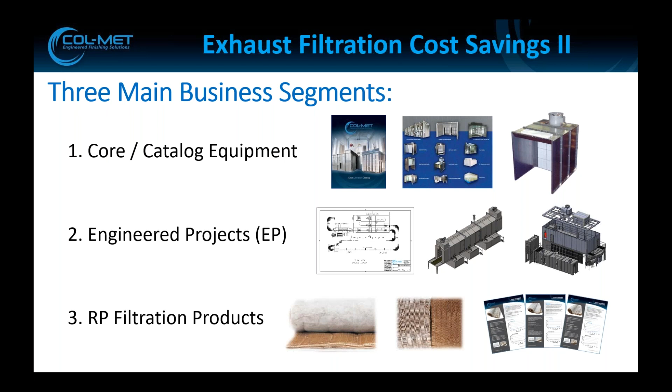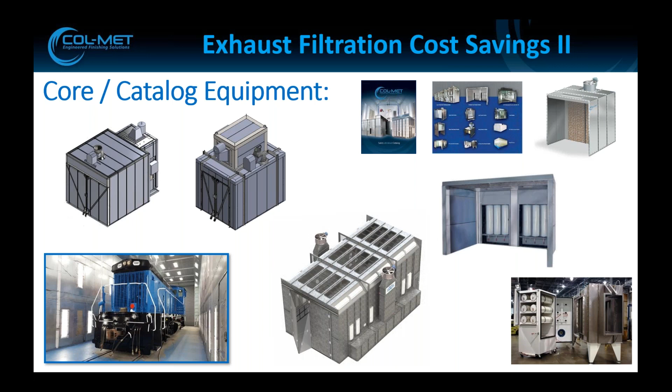To give you some examples, the core and catalog equipment, as I mentioned, is more of a standard type of booth. That can be a small booth up to a large booth like a locomotive, but the booth geometry is fairly simple, the airflow is fairly simple. For us as a spray booth manufacturer, it's very run-of-the-mill type equipment, even batch ovens of certain sizes and pass-through powder applications.

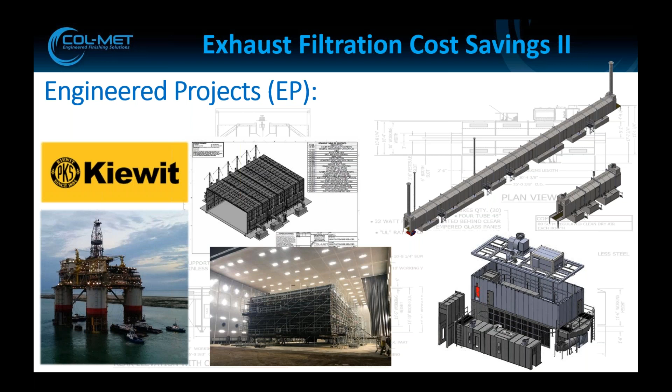But once we move out of that norm, we move into our engineered projects, which handle a lot more design, a little more engineering up front. The example on your screen is a very large booth for offshore oil rigs, about 265 feet wide, close to 200 deep, and about 65 feet tall. That particular booth blasts, paints, and is humidity controlled, so obviously there's a lot going on with that type of equipment. That falls into our engineered projects group.

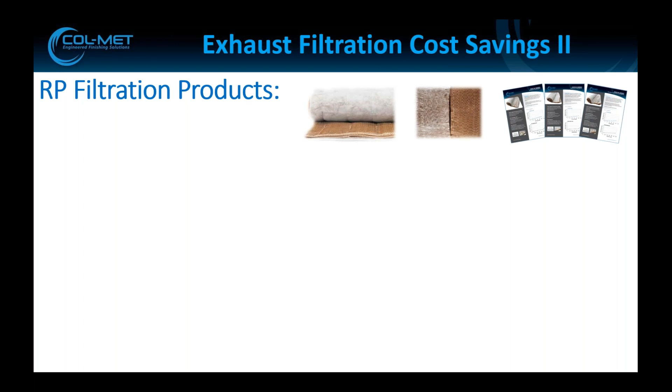Really where we want to focus is on our RP filtration products for this presentation. To give you a timeline, in 2017 Col-Met acquired Research Products. A lot of people ask, Trey, what does RP stand for? And that's just Research Products. We kept the RP initials in the name just to keep some brand recognition.

Research Products was the first manufacturer of a slit and expanded paper filter, and has been doing it well over 50 years, so there's a lot of brand recognition out there. We kept that and took over that part of their business in 2017. In 2018, we integrated that into our facility and brought all the manufacturing into our Rockwall, Texas plant. That was our main focus for those years.

Last year and this year, our main focus is growth. We brought on some filter specialists, created some new products and new programs. One of the new programs we're excited about is our 5-year warranty program. If you buy a Col-Met spray booth that qualifies, for pretty much a liquid spray where it's not a powder spray where we're utilizing the paint arrestor, then we send out the W series filtration with it.

Because we're so confident in that filtration, and we're the manufacturer of it so we know the quality and what's happening, we offer a 5-year warranty on our spray booths. That includes the booth and the air makeup units, anything associated with that piece of equipment purchased from Col-Met. That's a really cool program, especially if you're tied into the sheet metal or booth side of our company as well. That helps move things through.

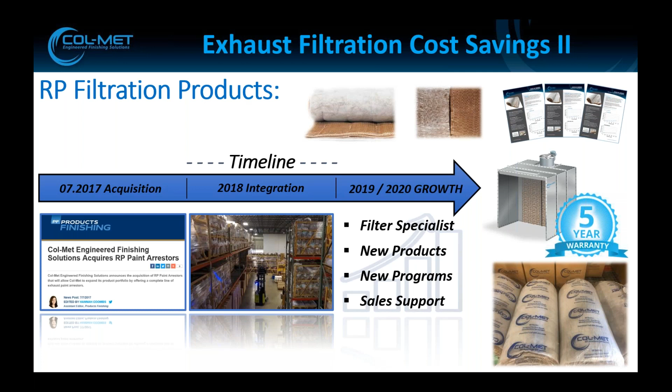To move through to the overview of our presentation today, this is a continuation of a webinar we did previously on exhaust filtration cost savings. What we concentrated on in that presentation was showing you the advantages of going from a pad filter, which is a 20 by 20 or 20 by 25 cut filter, to a blanket type media and utilizing the filter lock.

So I'll recap a little bit of that for this presentation, but mostly we're going to focus on a manometer. And oddly enough, you say, well, I don't understand how that can save me money. Well, from an end user perspective, a correctly set up manometer could possibly extend the life of their filtration.

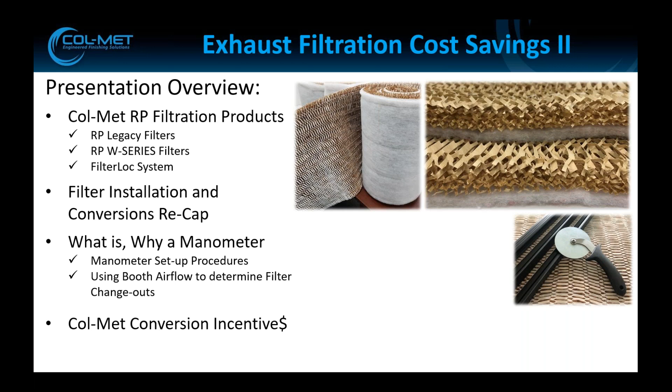So thanks for bearing with me through that introductory part. The RP filtration, in case you're not familiar, is a slit and expanded paper. The way that it's engineered really sets it up well to depth load, compared to like a polyester, which does a lot of the catching on the front of the polyester surface.

When you're talking about particulates and particulate sizes, there's larger and there's smaller. Well, those larger ones get caught on the front layer, and they face load that type of material - polyester, fiberglass, things like that. They want to face load. They don't necessarily load from the back to the front, or the finer materials out to the larger density opening. So our filter is designed to function that way because of the paper layering and the slit sizes.

We do use a polyester backing on some of our models, and our legacy series, if we're looking to bring our efficiency up for those smaller particulates I was talking about. And they're available in pads, blankets, and bags. So there's several models to these.

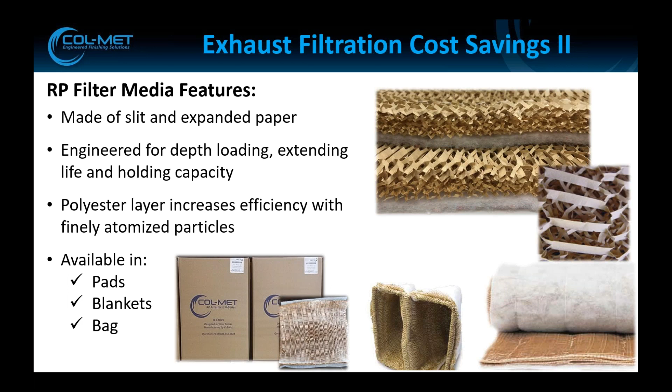I bring this slide up every time because I've had people say, well, we tried paper filters and they didn't work, and I don't want to talk about them anymore. But to be honest with you guys, before Col-Met acquired RP Products in 2017, I had the same opinion. I thought there was one paper filter. I didn't know there was different layerings and different paper weights and different orientations and slit sizes and things like that when it comes to the slit expanded paper.

So I bring this slide up to show you that we have a lot of standard families or models of filters, and each one performs differently with a different type of coating. So more than likely we have a filter that will work for your application.

Now, I'm not going to sit here and say that our filter works for 100% of applications. To be honest with you, if any filter company makes that claim, then they're kind of stretching the truth a little bit. Now, will it work? Sure, it will. Is it the most optimal to use in that situation? Probably not. So we have different models so that we can help that optimization to get where we need to be and achieve what we need to achieve. So I bring that up for that.

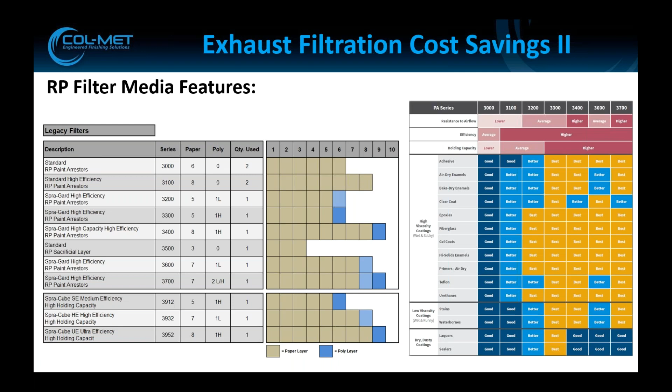Our newest filter that I talked about with our 5-year warranty is what we call our W series. And in essence, it's almost exactly the same as what we've been manufacturing before, but we did change up the paper layering. We did change up the face sheet of this filter and put a white face sheet on it. It doesn't change the performance of it any, but it does sort of brighten the booth up. It does change the look of the filter, and it gives the ability for this filter to be identified in the field as what it is, and to separate us from maybe our own filter as well as our competitors.

So the biggest difference here is our polyester that we use with these filters - it's a virgin polyester, whereas on our legacy line, we use a recycled polyester. So that is one of the biggest things. That's why we feel so confident about this filter, to be able to offer a 5-year warranty as long as these filters are being used. And we don't take away a warranty, we just extend it for 4 additional years, pretty much what we're doing.

So these come in pads and blankets as well. Right now, I don't have a standard that's made as a bag or a cube, but it can be done if we needed to. So just keep that in mind.

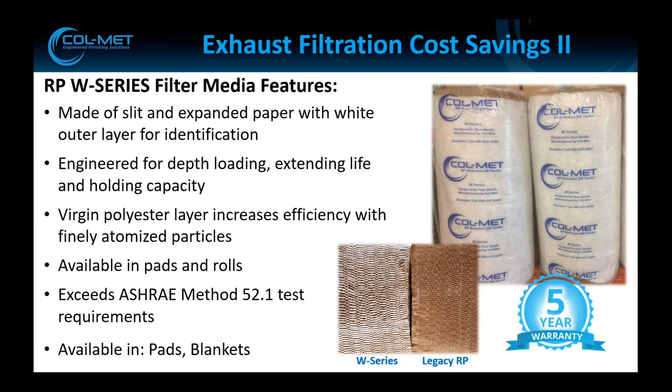Now, when we talk about the models of this filter, we've sort of brought the models down into a little more manageable type - a little more of what we see as the higher usage type filters from our history with making filters, since the 50s. We've settled into 3.

That just helps our distributors and end users better select a filter without having to go through so much gyration in models. But like I say, they're all designed to work a little differently with different types of applications and coatings, so just keep that in mind.

If you did buy a Col-Met spray booth within the last year, it would have shipped out with what we call our W5100 series, just as a standard, unless we were told differently. So that's sort of the middle of the run of the W series.

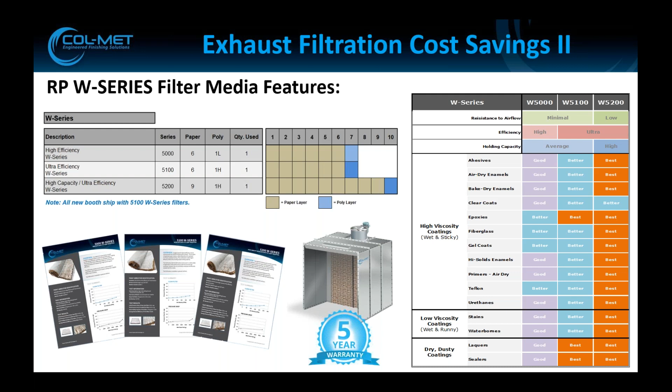I wanted to touch base again on our last presentation with the cost savings and the installation and the conversion. So there's a lot happening on this slide. I know I just took a slide from that presentation.

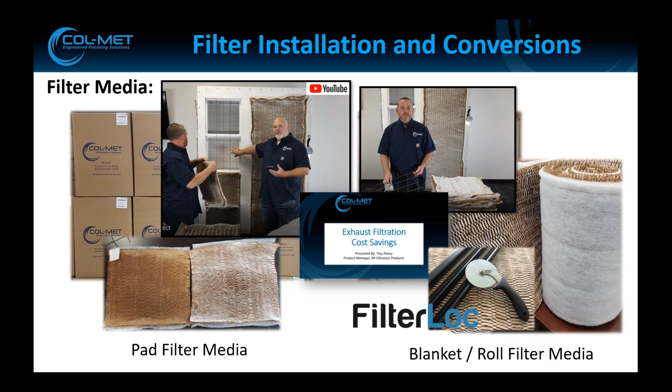So let's talk about some new information. And why did I say, hey, let's talk about a manometer when we're talking about filters? So a visual gauge is required by OSHA.

Now, it can be a manometer, which I'll show you right now. This is a gauge, a device that's sent out with all of the Col-Met spray booths. If it has an exhaust chamber, and it's for liquid painting, it has one of these. So it can be a manometer, a magnehelic, excuse me. You can see photohelic sometimes, and things like that.

It just needs to be some type of visual gauge that shows and helps indicate the level of loading that the filter has. So with our type of filtration, and I talked about that depth loading, sometimes they look like they may be loaded. You look at the filter on the front, it has a lot of coating on it. There may be something dripping off of it, but that doesn't mean that filter down inside there has actually shut itself off yet. It may still have some life left to go.

And the only way to really know that that's still available to you is to know how much pressure differential your booth can handle in your system. So being that we are a booth manufacturer as well as a filter manufacturer, we have a little different opinion on how manometers should be set up, I believe, than most people.

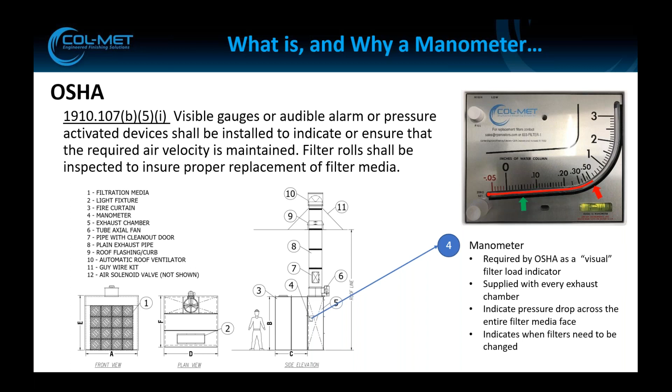It may not even be close. So that's why it's kind of using just a standard rule of thumb to say this is how much deviation you get in a filter. It doesn't work. Different types of filter media can run longer with one coating type versus another. It's possible for a filter life to be longer than what it did previously. So let's talk about setting up our manometer for your system, the one you touch and use on a daily basis.

There are two ways to do this. To be honest, these are the two preferred ways that I give people. These are the ways we use to determine where we want to start, and then where we define down to.

So one way to do this is to understand what your exhaust system's capability is. You can do that by calculating the static pressure that's available to the fan, the filter load. When your fan is designed, it's designed to operate at a certain CFM at a certain static pressure. Depending on how your system is running, you have a certain amount of available static pressure, and that, in essence, is how much you can load your filters.

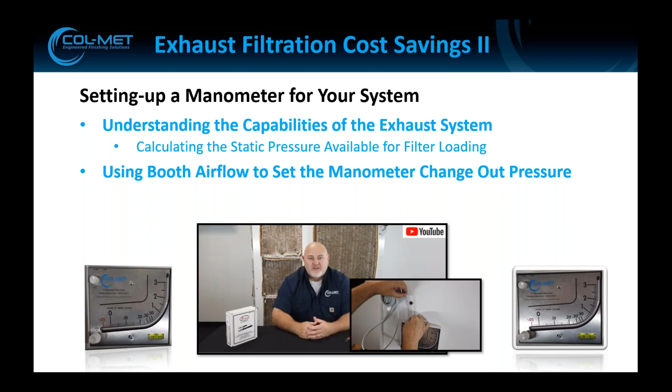Another way, which is probably the most precise but does take a little more time - which I think is definitely worth the effort - is you use the booth airflow to set the manometer. Let's talk through this first example of understanding our static pressure, the capabilities of our fan. It's a faster way to do it, and it gives you a really good baseline where maybe you can start out that way and see how things are operating.

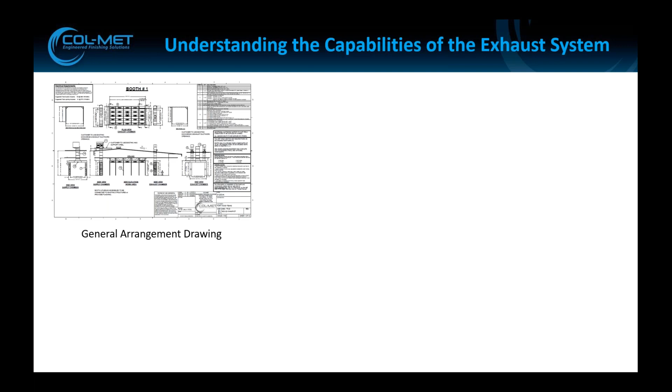So I threw up an image of a general arrangement drawing from Col-Met. I assume if you have another manufacturer's booth, you'll have some type of drawing like this that gives an overall picture of what you're looking at purchasing or what you built. On there somewhere is a general bill of materials, and it highlights the high-level items. It's not breaking down panels by panel and bolts by bolts, but it tells you what you have. In this example, you have LED light fixtures.

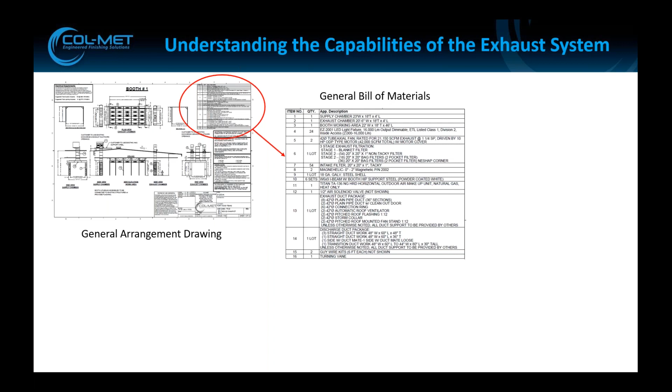24 of them. You have two 42-inch fans. This actual application used 3-stage filtration, so you had a blanket, then panel filters, and then pocket filters. So this is the example that we pulled out.

But what we want to look at today is that line item that talks about the exhaust fan. It tells us right here that we have a 42-inch tube axial, rated for a certain CFM at a certain static pressure. That's what we really want to concentrate on for our purposes here today - this fan is designed to move 21,150 CFM, let's just say 21,000 CFM, at 1.25 inches of static pressure.

Now, this system, because it uses 3-stage filtration, is already allowing for additional resistance, because now we have the initial resistance for 3 different layers of filters. So we need a little more static pressure. You can see from our drawing that our ductwork is pretty straightforward - it's going straight up to an ARV. We're not really seeing any additional static there.

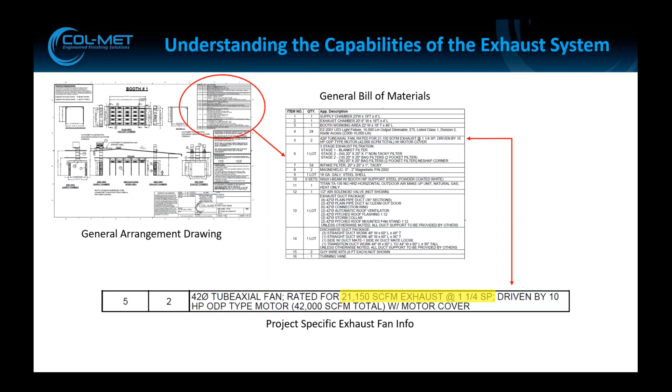So whatever is over our initial static of our filters is how much this particular application is going to be able to load the filter. Now, there is a maximum load for filters, and we'll talk about that in a second, but it's honestly very hard to overcome if you have enough area running in your fan. Of course, if you get so loaded that you can't pull, you start actually dragging material through your filter - you just have to be cautious of that. Usually you won't see that until about 3/4 to 1 inch of resistance, and most applications' fans aren't designed to handle that much static capability.

So let's go through this a little bit and give you an example of what I'm talking about. You take your initial filter resistance, which can be found in literature from the manufacturer. We can provide you testing data that shows on our filters what the initial static pressure drop is. In the example I put here, you'll notice that first line item of that pop-out is 0.03 inches of water column.

Okay, so that's at 150 feet per minute, because all tests for the arrestance are done at 150 feet per minute. So first off, we'd have to understand what feet per minute we're using in our application, to know exactly where we would be.

There's a little chart indicated on the testing that shows as the velocity increases, so does the resistance. So we needed to be able to do those calculations, which is easy. Just CFM divided by the filter face is going to give you your velocity.

The second thing we have to think about when we're talking about static pressure ability is what the fan is seeing for inlet static. Is there ductwork on the inlet side of the fan? Are there elbows? Are there transitions? How is the fan able to get air into the bottom of it? Because if there are transitions, elbows, and 90-degree corners, that creates static pressure.

So we can measure that static pressure and be very technical, get in there and actually measure it with a pitot tube to find out exactly what that negative static pressure is so we know the exact number. Or we can take some educated guesses, let's call it, and say a 45-degree elbow is going to bring me an eighth to a quarter, and that can help us set a baseline.

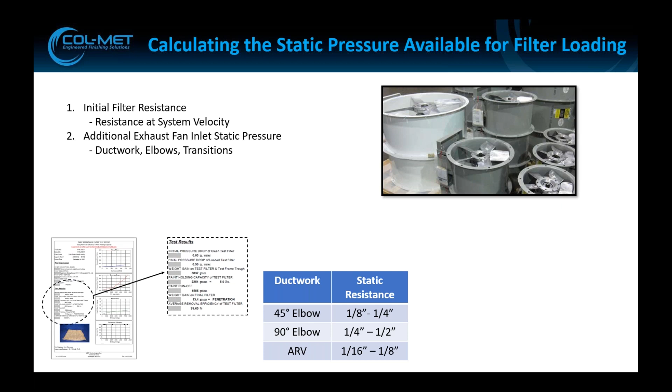The third thing is what is our discharge static pressure? Because now the fan has static on both ends of it—if there's elbows, long runs of ductwork, or transitions, the ARV, which is your roof ventilator, on top, all generate some type of static pressure. Now, one thing I wish I would have added is when we're thinking about static pressure...

we've got to cover all aspects of that fan's performance. So let's say, and it happens sometimes, there's an elbow that sits right on top of the fan. This is obviously not optimal for a fan at all. It probably cuts the fan down to about 40% of its ability, especially if it's on the intake, because now only half of the fan is loading due to the way the air streams around that elbow. But it does happen in the field. And what that's called is system effect. You have to understand how much system effect you're adding into a fan.

So I'll tell you this: if you have a half-inch capacity fan and you put an elbow right on top of it, you've taken all the capacity of that fan at that elbow. So any additional ductwork, any filter load, any of that is now starting to suffer your CFM.

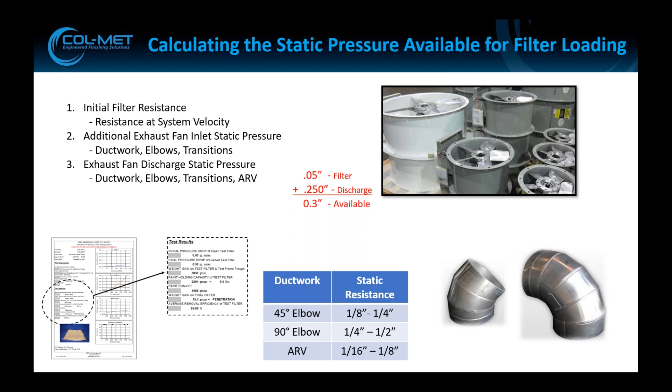So anyway, let's get to a little more precise way to do that. And to talk about this, let's talk about a little background. OSHA and NFPA require that a spray booth move a certain amount of airflow.

Everybody's probably heard that in a cross draft you have to move 100 feet per minute. If you're spraying electrostatic, you can get by with 60. OSHA also gives us a table in 1910.94 G-10 that says in all these different setups, you can run 50 to 250 feet per minute. So OSHA kind of defines this out.

Then they go back in the 94 C62 and reference NFPA, which just says to never exceed 25% of the lower explosive limit of the solvent or coating being sprayed, which is what NFPA Chapter 7 says, do not exceed more than 25% the lower flammable limit. The NFPA doesn't necessarily make any recommendations on velocity through the booth. It just says do not ever exceed the 25% lower flammable limit.

So what that means is when Col-Met designs a spray booth, let's say we have a little small open front spray booth, and we design that at 100 feet per minute, or 125 if it's a standard, because we allow you to make 25% openings in the side for conveyor if you wanted. But let's say we didn't need that, and we had 100 feet per minute. As soon as our filters load to the point that our fan can no longer take the static resistance, we're no longer moving 100 feet per minute.

So now we're in a violation. This probably happens every day in places around the country where their booths are not actually moving 100 feet per minute. A lot of people don't notice it until the overspray gets so bad that it's sticking to the walls and dry falling on their coated part, or it's migrating outside of the booth. If it's a pressurized booth, it's blowing out all the doors and anywhere it can. And that's when a lot of times this comes about.

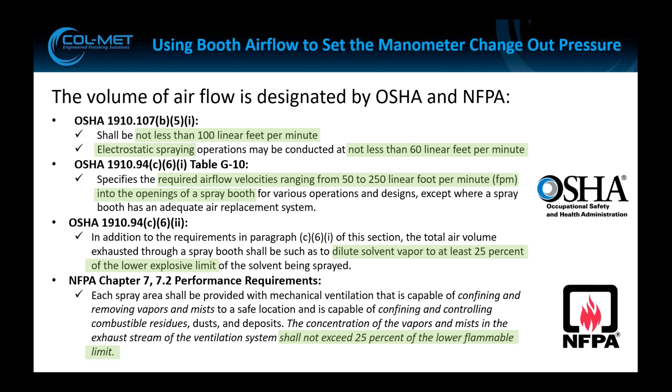So when we work through airflow through a booth, I did a video on this, and I put that image down at the bottom just to remind everybody that it's on YouTube. I go through it a little more in depth than what we will now. I walk through the math with you and work through this, but to set up a manometer with the airflow of the booth, which is something I recommend anyway.

That way you know if your booth is performing the way it should, even aside from the manometer. You set your booth up with clean filters and balance that booth out. So if it's a pressurized booth, what pressure do you want to run at? Do you want to run at 0 inches, which means you're bringing in as much air as you're taking out? Or slightly negative, meaning you're exhausting more air than you're bringing in, which means you're pulling air through doors or anywhere you can. You're testing all the seals of your booth at that point.

Or slightly positive — so if someone opens the door, you would rather air blow out than suck in Bondo or whatever might be outside of the booth. So it depends on what you're looking to do, but you need to set that up. It needs to be running that way.

Then you need to measure the airflow. I recommend using some type of anemometer, which are easy to use. The main thing is to make sure the one you choose is sufficient for the range we're talking about. It needs to be able to get down to probably 100 feet per minute and tap out somewhere around 600 or 700. If you find a gauge that's good for 2,000 to 10,000 CFM, it won't read these numbers right. Gauges are set up to run most optimal in the center of their range. So if it's 100 to 1,000 CFM, somewhere around 500-600 is going to be your optimal range. Just keep that in mind when you're picking these instruments out.

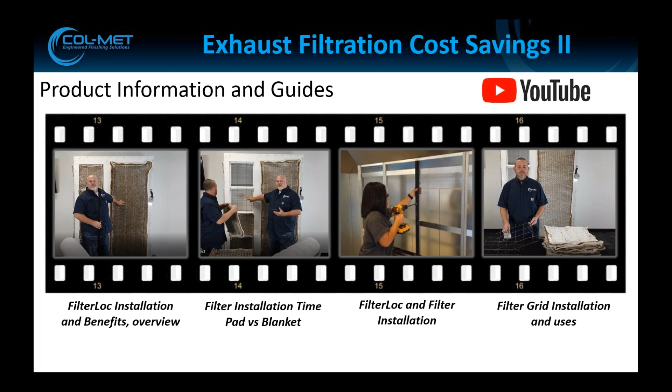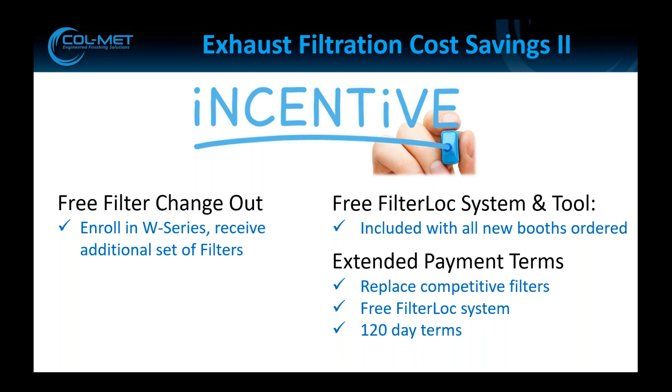So that's all that I had.